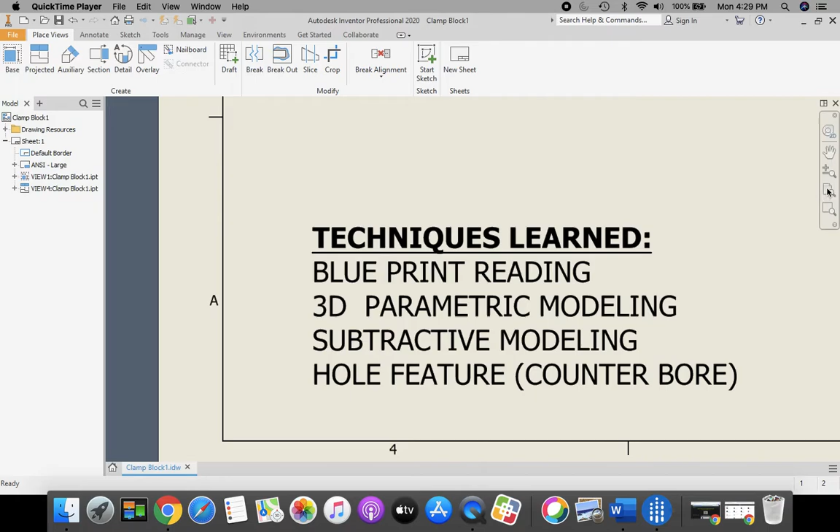You can see from our front view in our drawing, we're going to start off with a rectangle that is 4 inches wide horizontal by 1.25 inches tall in the vertical. So a rectangle that is 4 by 1.25.

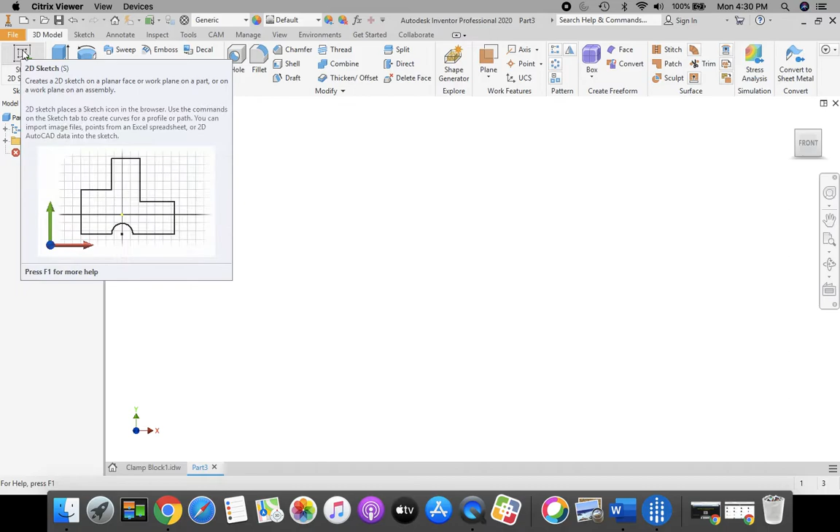To begin, we're going to start with a fresh Inventor screen open. In the ribbon bar at the top, we're going to click New, Standard IPT, and click Create. Going up to our ribbon bar in the top left corner, we're going to click on the drawing with the green plus mark, 2D sketch, and as always, we're going to select our XY plane. Before we start drawing, we're going to click Front in our World View Cube.

For that rectangle, we're going to click our rectangle tool out of the ribbon bar at the top. Start at our origin. When you get your green dot, click and stretch a rectangle to the upper right-hand quadrant. Here we're going to type in 4 for our horizontal dimension, press the Tab key, 1.25 for our vertical dimension, and press Enter on the keyboard.

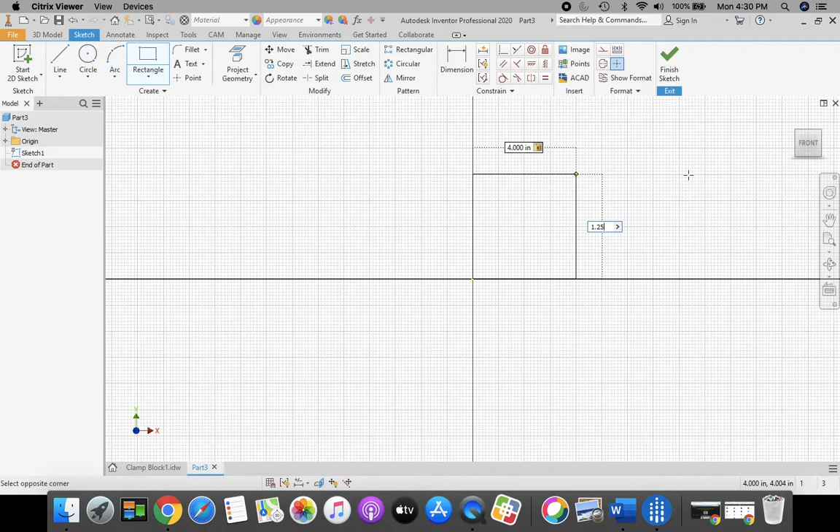Next, we're going to go up to the top right-hand corner of our ribbon bar, and we're going to select Finish Sketch, the green check mark right here. And I'm going to go home by my World View Cube.

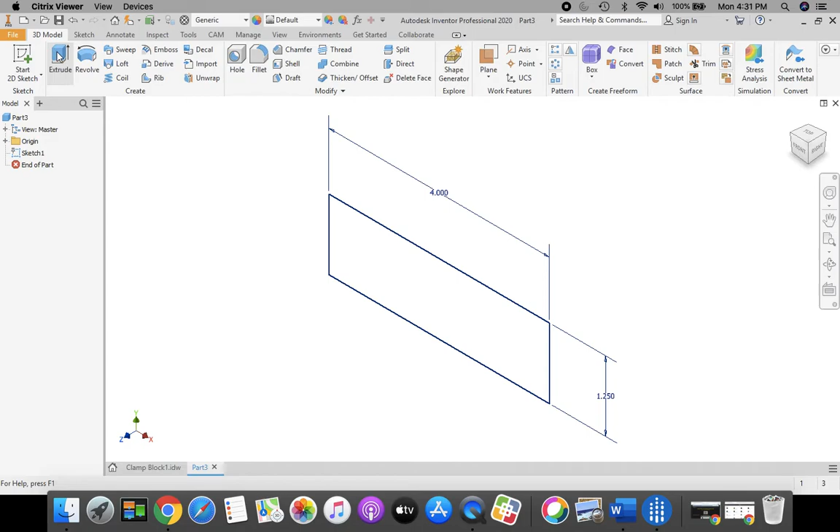Next, I'm going to take an extrude. I'm going to click Extrude right here. Now in our Extrude menu, I want this to be in the flip direction to make this arrow point away from us. And now I want to enter in a depth for how far back we're going to extrude.

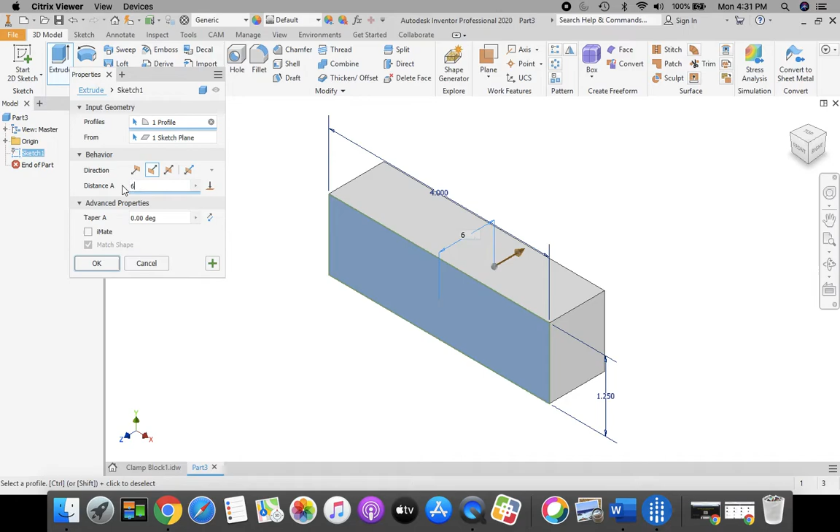If we take a look at our drawing, this is our front view, and on our side view it shows us that we're going to extrude 6 inches. So let's go back to our part. I'm going to highlight this distance here, and I'm going to type 6 inches in for the distance. I also want that flip direction as well. Then click OK, and go home in your World View Cube.

Next, we're going to take and cut out these corners in the front view of our clamp block.

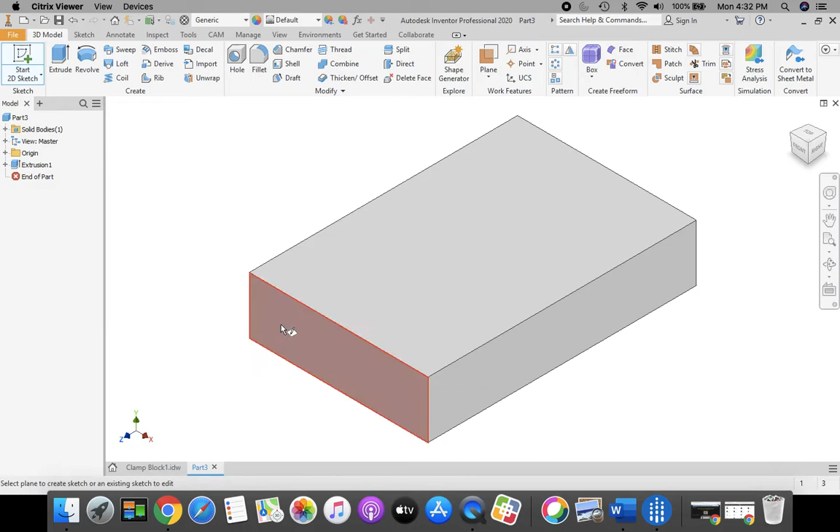I'm going to take a 2D sketch and place it on my front view. 2D sketch is the picture of the drawing with the green plus mark. When my front view highlights as red, I'm going to click to place that sketch.

I'm going to zoom in a little bit and use my rectangle tool for this. Before I draw this rectangle, I want to take a look here. This rectangle is 0.75 for the width of it and 0.63 for the height of it, and that's for both sides.

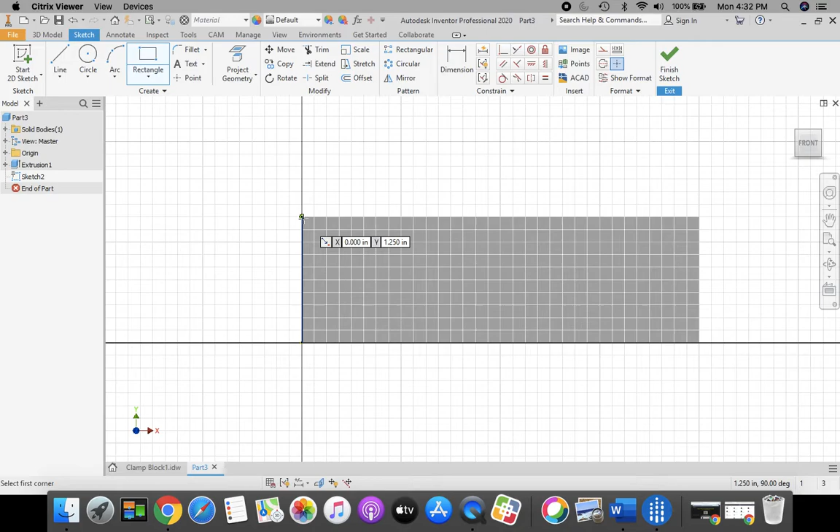So let's start in the upper left-hand corner. When I get my green dot that shows it's locked onto that corner, I'm going to click and stretch out a rectangle. The horizontal dimension was 0.75, so I'll enter that in here, press the Tab key. My vertical dimension was 0.63. Once you have those two numbers entered in, press Enter on the keyboard.

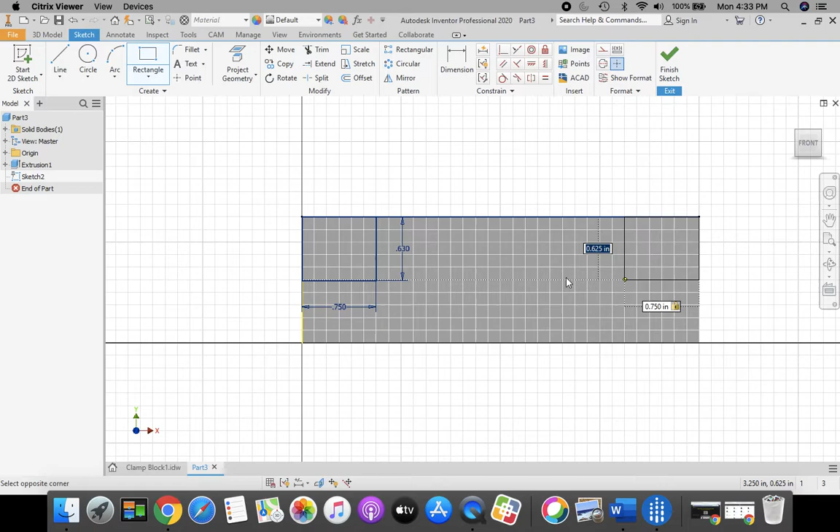Now I'm going to go on to my next rectangle in the upper right-hand corner here. If you lost your rectangle tool, it's not a big deal—just come up to the top and click on your rectangle tool again. We want to start in that upper right-hand corner. Once I get my green dot, I'm going to click and stretch this one out. Since this is the same dimension, I'll type in 0.75 for the horizontal, press the Tab key, 0.63 for the vertical. Once entered, press Enter on the keyboard.

Once we have those two corners drawn, we're going to come up to the top ribbon bar and click the green check mark, Finish Sketch. Now we're going to take and extrude and cut them, so we're going to select our Extrude button again.

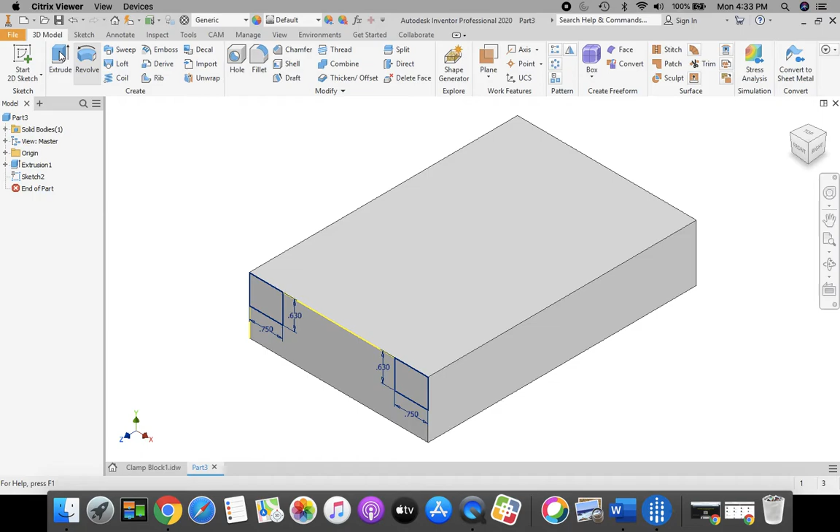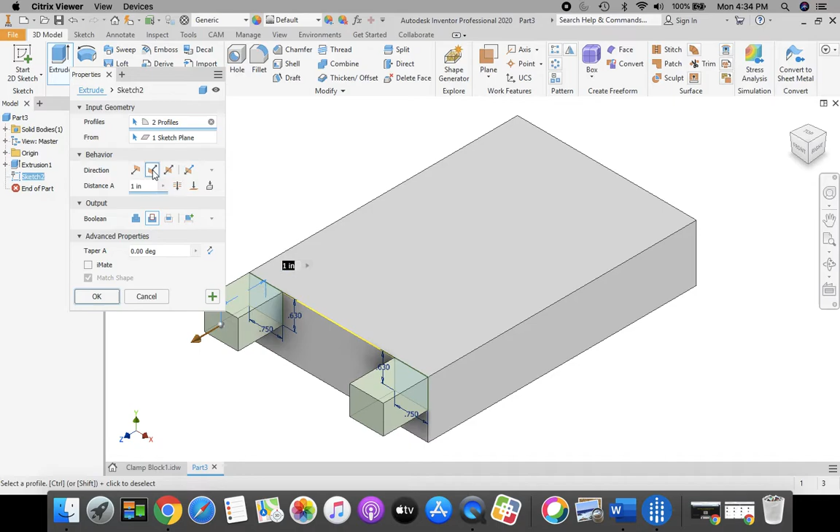Nothing happened, so I need to select those two surfaces - this square and this rectangle here. Once you have these two rectangles selected, you can see it's coming out towards us. I want to put this in the flip direction so it goes to cut. I'll enter a distance of 6 inches to cut all the way through, then select OK.

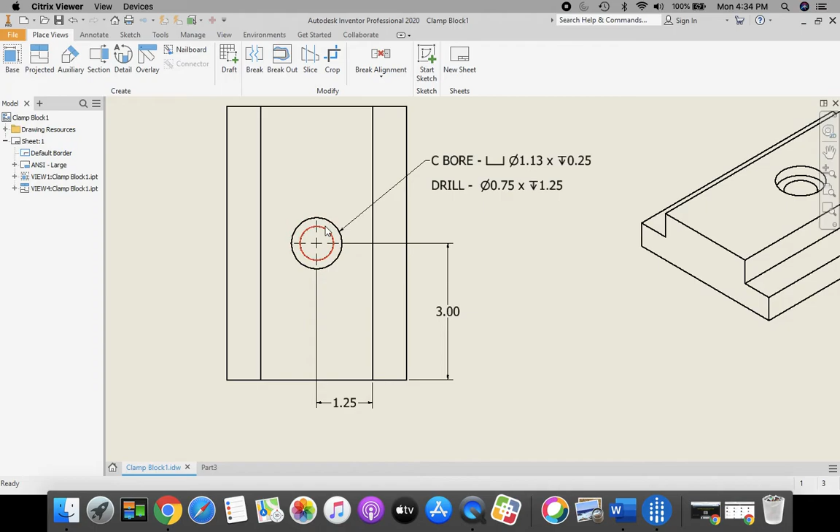Great job so far. Now we're going to put this counter bore for the hole at the top. For this counter bore, we're going to start with a point located 1.25 inches in from the side and 3 inches up from the bottom. We'll come back and take a look at what all this stuff means.

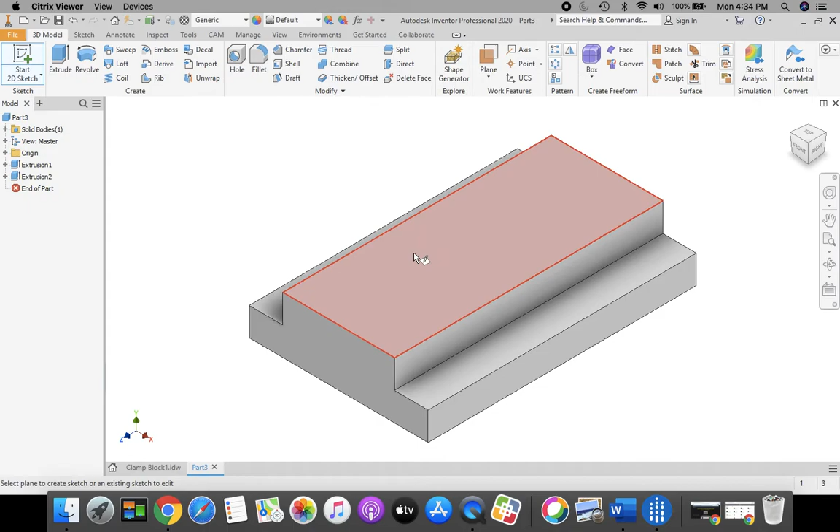So back to our part. We're going to take a 2D sketch, this drawing with the green plus mark, and place it on the top view of our part. Click top in your world view cube to zoom off.

I'm going to select my point tool from the ribbon bar at the top, and click one point at the top of my block. Now I need to dimension that.

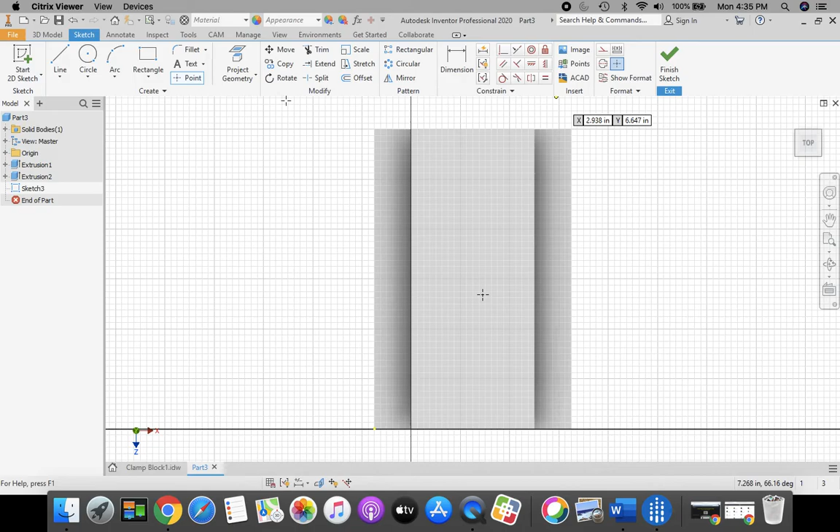If we go back to our sheet, you can view this as a PDF or follow along here. It is 1.25 inches in from this side, and it's 3 inches up from the front. Let's go back to our part.

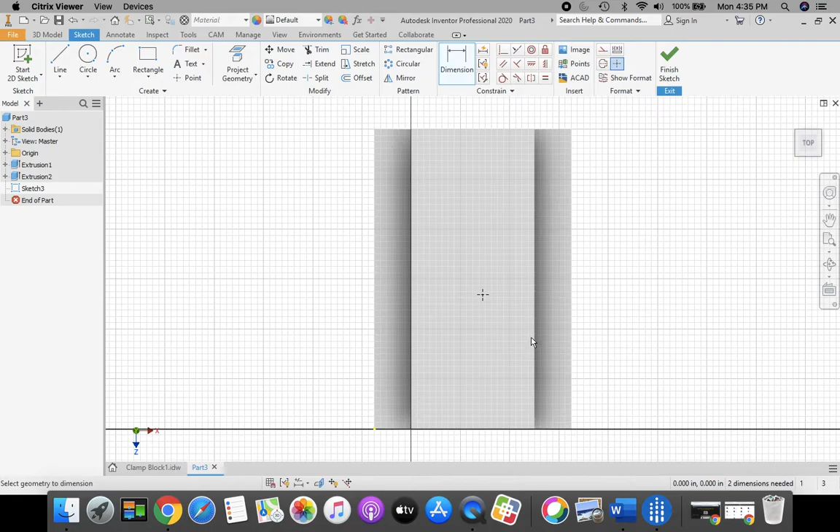Now I'm going to dimension from this side of my clamp block, not the far outermost side, this side that we just got done cutting. We're going to click when it turns red, and when our cursor gets to the point, click once again and pull this dimension down. This dimension here was 1.25. You can press enter on the keyboard or click the green checkbox.

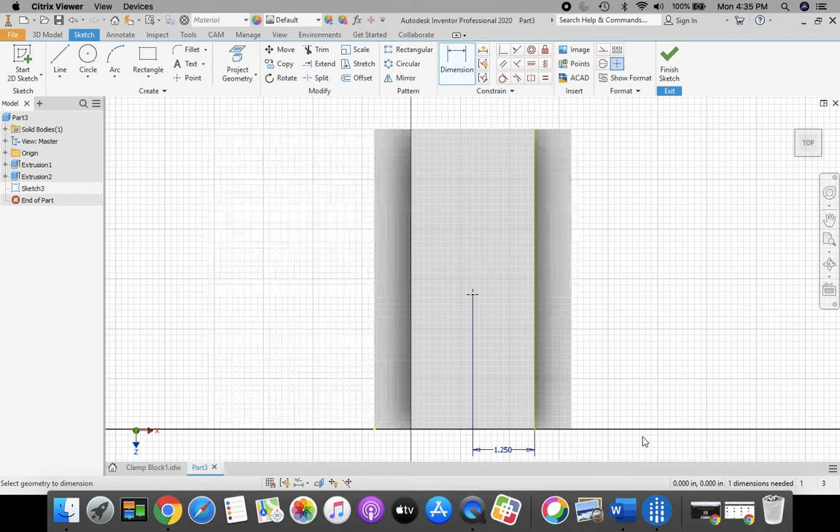We also need another dimension from the bottom of our block to where our point is located. Click when they turn red, bring this dimension out to the side. This dimension is 3.0. Enter on the keyboard or green check mark.

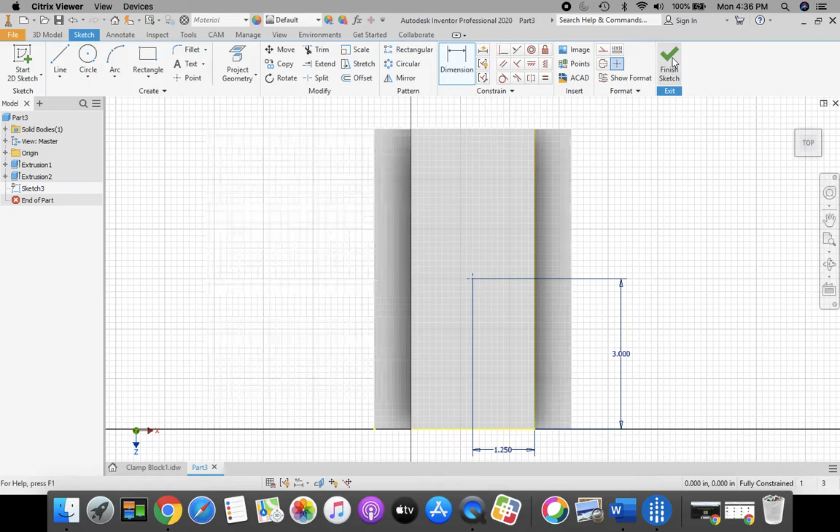Great job so far. Now we're going to finish sketch, green check mark, and go to my hole tool up here at the top.

Now before I select my hole tool, let's take a look at our drawing. This has a double hole sort of drilled in front of it. It's called a counter bore. The counter bore is the first thing that we're going to enter in.

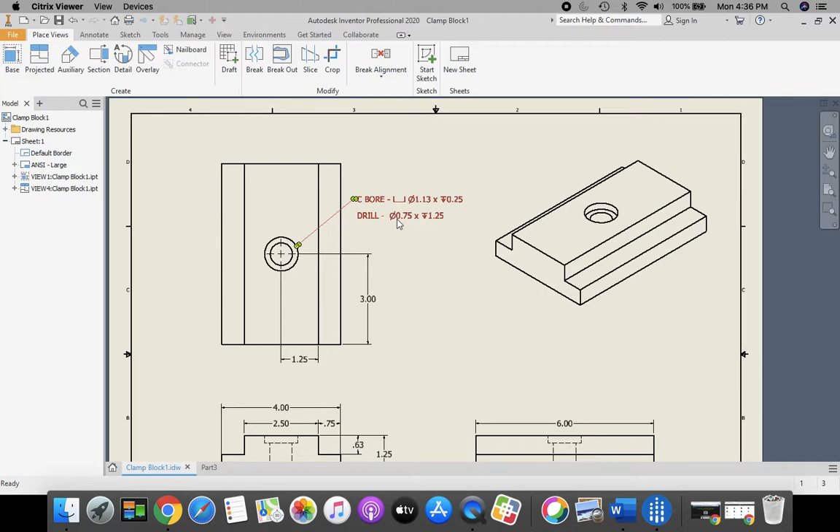It has a dimension for a diameter of 1.13 and a depth of 0.25. The drill diameter is 0.75 by 1.25. So let's take a look at doing that.

Our hole tool is right up here in our ribbon bar. We're going to click to select that. It should automatically select that point, but if it does not, you may have to come in here and click that point, and then it should automatically select.

A couple of things in here we want to change. For hole, we want this to be a simple hole, so this box should be selected. And since we're doing a counter bore where it says seat, we want to select our counter bore button, and that should give us these dimensions here. I also have a termination distance select and a direction towards us.

For our counter bore dimension, we're going to type in 1.13. For the depth of that counter bore, I'm going to type in 0.25. My depth of the hole comes next at 1.25, and my diameter of that hole is 0.75.

So once I have those dimensions entered in, I have simple hole, I have a seat with a counter bore, I have a distance default, and then my dimensions that I just got done typing in here, I'm going to click OK.

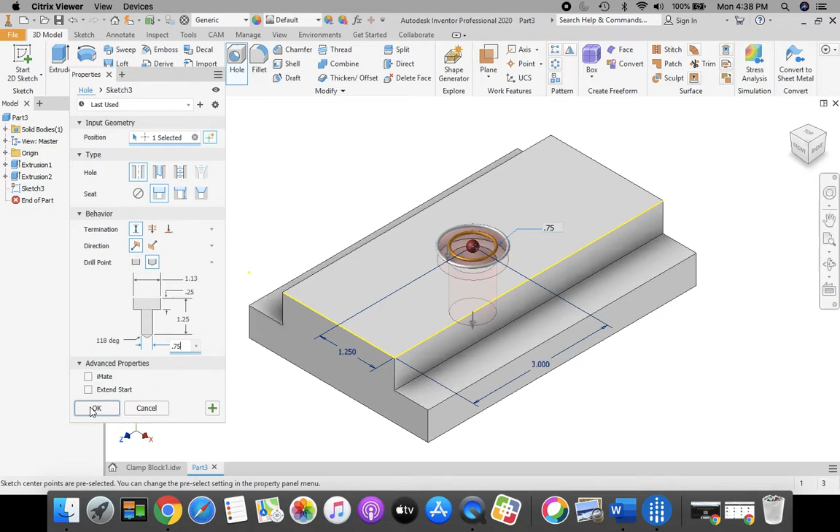Great job, it looks like we're done. The only thing we're going to do next is change our material type. We're going to go up to the top where it says default, click the selected in the pull down menu, scroll up to the B's, and select beige.

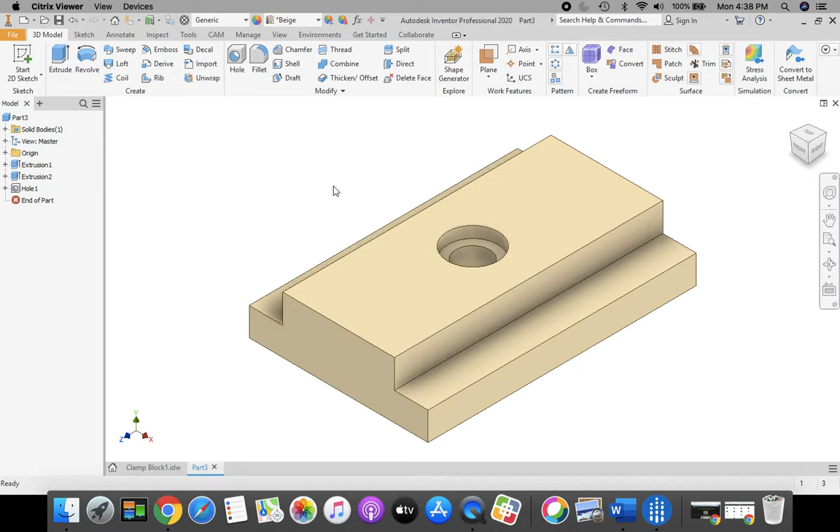Once you have it as beige, we're going to go File, Save As, the orange file in the upper left hand corner, Save As, and I'm going to select my H drive. This should come up as first initial last name 000. If it does not, you need to click on the pull down menu here, scroll down to the bottom and select your H drive, first initial last name 000.

And here for our part name, we're going to call this clamp block. Once you have this titled clamp block, H drive is selected, click Save.

Great job. The next video is going to be how to put it on a standard IDW and how to turn it into Google Classroom.